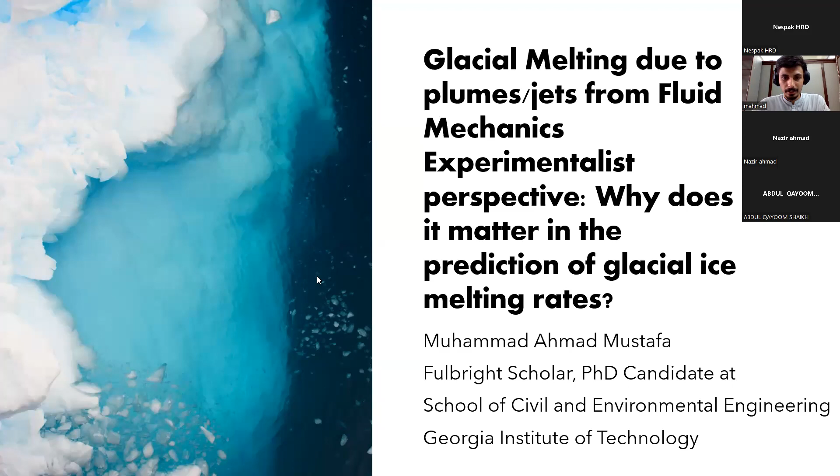Then I went on to a cultural exchange program at Portland State University, Oregon, USA. Keeping up the pace, I moved on to Georgia Institute of Technology as a Fulbright scholar for a master's. I did my master's in hydraulics and water resource engineering, and did a couple of research problems.

While doing the research problem, research really intrigued my interest, and thanks to the funding agencies as well who funded my PhD program to pursue my passion for research.

So as I mentioned earlier, I will be starting with the random jet stirred homogeneous isotropic turbulent tank. Before I start, let me mention, I would request Sabika if she can unmute everyone so that they can mute themselves.

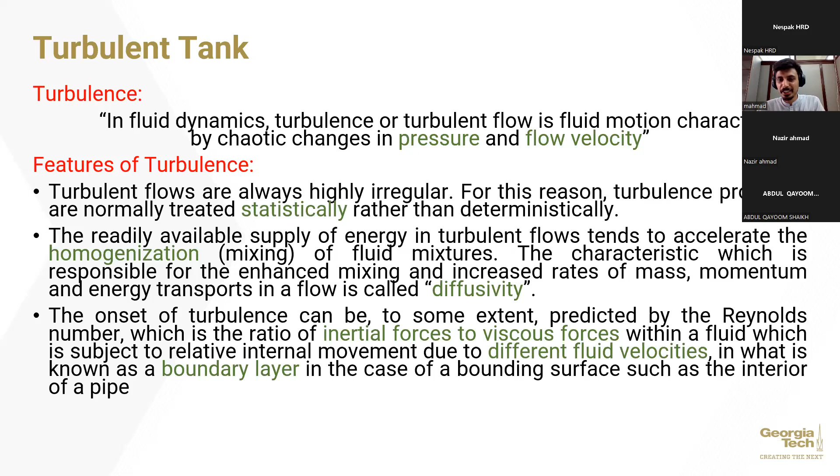I wouldn't go into that. That slide was just an introduction of what turbulence is and how it can be defined, but there are many definitions without argument. My work with turbulence is always with the phenomena of transport of environmental fluids.

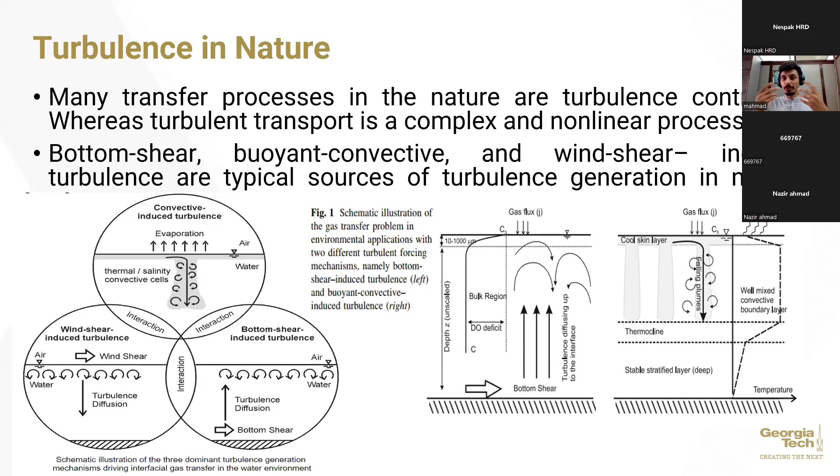This slide shows how different transport processes occur and how different turbulence-induced mechanisms happen, like bottom shear, buoyant convection, wind shear, through which oxygen is regulated in the water, and how oxygen or other pollutants like nitrogen or potassium are transported through soil or through the air in different means.

What are random jet stirred tanks? In the research field, I hope many of you already know about it. The mean velocities really interact with turbulence fluctuations. It's very difficult to actually decompose velocities into mean velocities and fluctuating properties.

So what we really do in research is try to isolate the random turbulence u prime, v prime, w prime fluctuations in isolation, and then study how they behave, and try to predict statistically, not exactly, how they are transported and what their role is in different mechanisms.

Over here you can see a random synthetic jet array. It's an array, like a grid, with different jets. These jets are nothing but simple submersible pumps, but connected to a program, MATLAB or Arduino. You program it in MATLAB to turn these jets on and off randomly, and then try to find the vortices or turbulence in a specific field.

The characteristic of that turbulence needs to be homogeneous and isotropic. Homogeneous means the intensity of turbulence, the U prime production, is the same in every direction. It also needs to be temporal, meaning the same throughout time. This means you cannot draw a conclusion from any study within just an instant; you need to study things over a long span of time and in every direction. That's why we need homogeneous isotropic turbulence, the same in every direction and continuous with respect to time.

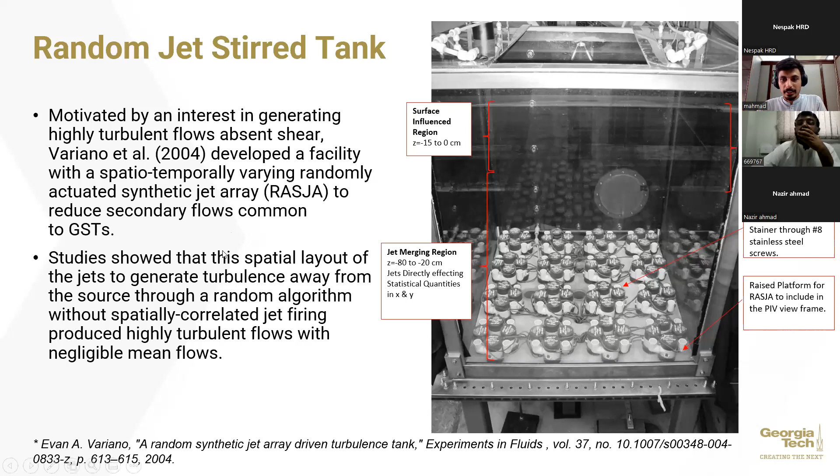This is another example of the orientation we created with homogeneous isotropic turbulence. This was introduced by Evan Variano, and they have different dimensions. It's actually quite an old technology now, with different tank dimensions. These homogeneous isotropic tanks can be used in different studies, including erosion, pollutant mixing, plumes, jets, and many things. This is just an overview; if someone is interested, I can share the slides.

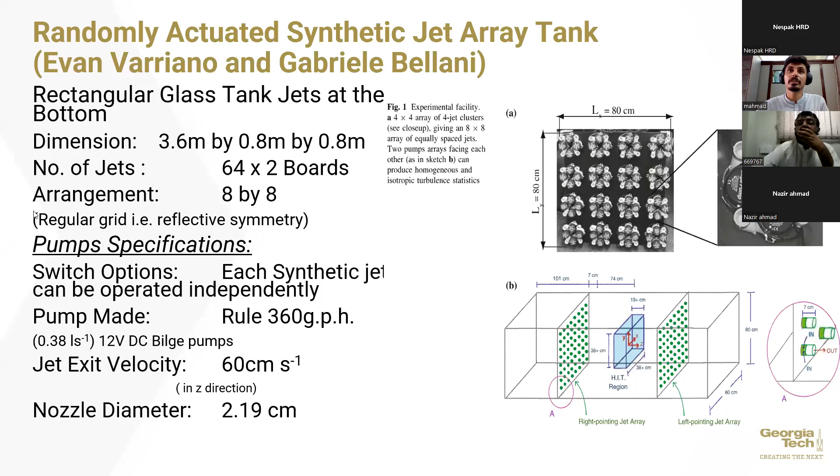Turbulence Reynolds number is a Taylor Reynolds number. If you're interested in fluid mechanics, that's another topic. What I'm trying to say is that turbulence has different scales with respect to length. To be precise, you see different sizes of vortices in natural flows. Even in rivers, there are big vortices and small vortices, and those vortices have lengths. Those lengths are the Taylor lengths, and from those lengths you can actually get the Taylor Reynolds number.

In the lab, we have always been trying to achieve a higher Reynolds number by increasing velocity. There's been a conundrum of how to achieve the Reynolds number without introducing any mean flow, because mean flow is actually the one injecting energy into the system. The maximum Taylor Reynolds number achieved so far has been 372, 378, which is still low compared to natural processes in the environment.

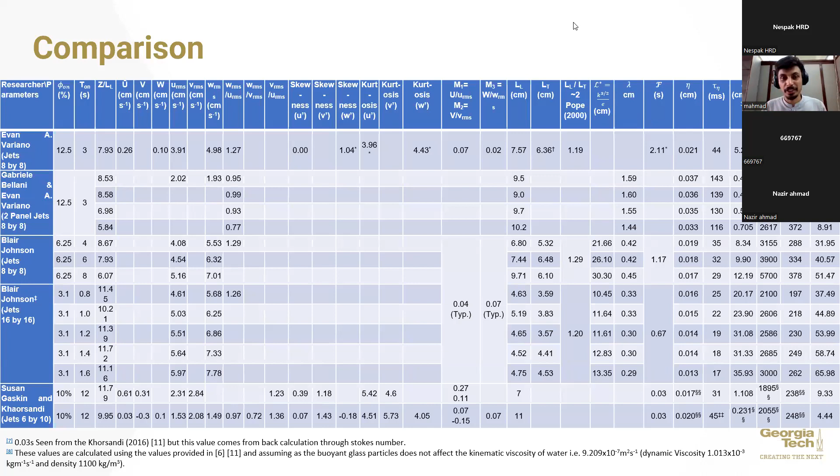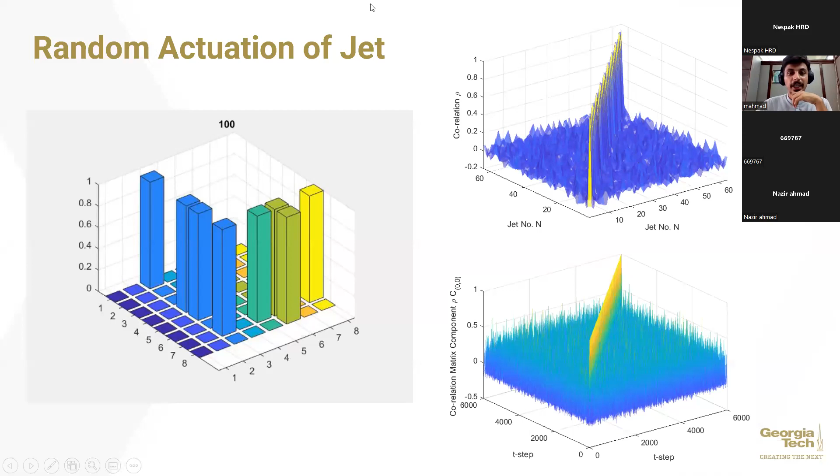Moving on, how do we increase the optimization of synthetic jet arrays?

Fractals, these are very interesting. Actually, this was the most interesting topic I came across. With fractals, there hasn't been any formal mathematical definition. Mandelbrot, who actually invented the fractals, and you'll be surprised how they were invented. Disney has their own graphics and mathematicians, and they've always been working to improve the resolution and outlook of the cartoons, trying to make it as real as possible.

One of the biggest questions for them was that there is a certain limitation to the shape. If there's a triangle, it's a triangle, and when we zoom in, it's a triangle. Let's say if you're making a mountain and represent it as a triangle, but as you zoom into the character, which is zooming into the mountain as well, you don't see the mountain anymore. You just see a flat line, which isn't actually like reality.

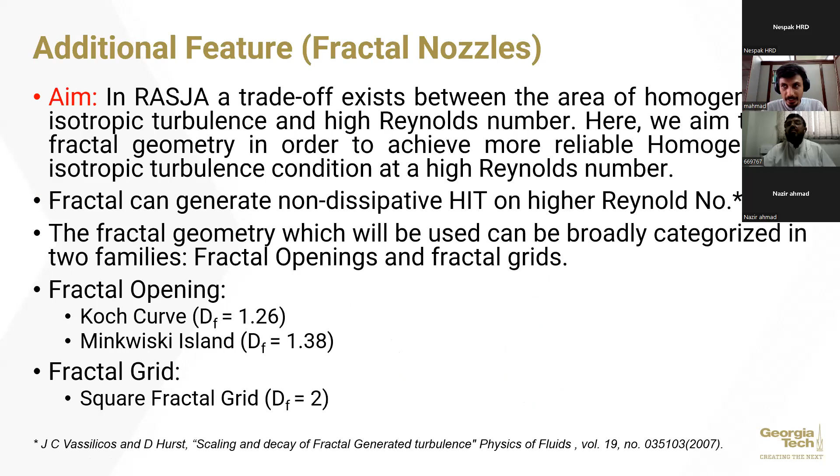You've seen a regular grid, which is just a mesh. Now I'll show you how the fractal grid looks. Before that, here are the two Minkowski and Koch diagrams in front of you.

We decided to go on to the fourth iteration. These are the cross-sectional areas and different major and minor details with respect to the figures, which I know you won't be interested in, but I'll just mention how we compared apple to apple, keeping the cross-sectional area the same as much as possible.

Moving on to the fractal grid squares—this is a grid scale, which I designed as per the fourth iteration. The cross section you're seeing is the cross section of the nozzle through which the water flows. The big rectangle with thick lining is the first iteration.

If you look at my mouse, I assume you can see that. This is the second iteration, and then this is the third, and this is the fourth.

The thickness is each sphere's thickness, measured in millimeters. You must be asking, it's quite thin—how would you be able to manufacture it? Interestingly, I'll show you how we manufactured it.

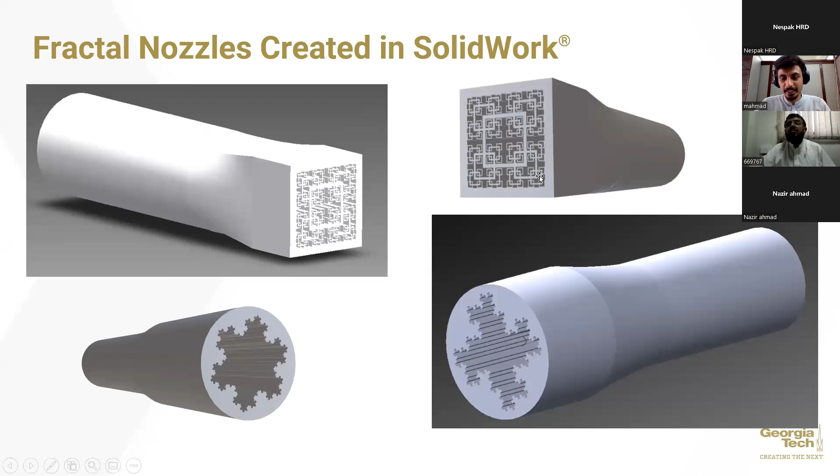This is actually the 3D diagram of the fractal grid which I built, and you can see it's an opening.

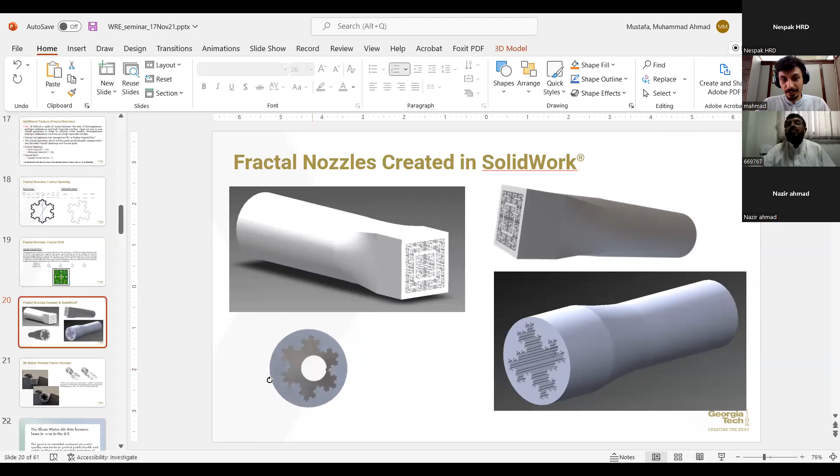One must ask how you can assume the flow will be developed. Well, if you can see, it's quite long along the flow line. That's another aspect we considered, giving a transition of 1/6 at the start and then 6D for the development length. That's how it forced out a jet. Similarly, this is the Koch triangle, which is an opening.

So we used a 3D printer to print these fractal nozzles. At Georgia Tech, I was fortunate enough to work in the Invention Studio, where you can 3D print, laser cut, or do anything you want. So what I did is I just 3D printed it.

The next thing we wanted to do was put it in front of the nozzle and study how the homogeneous isotropic turbulence can be enhanced. But due to COVID, we could not perform the actual experimentation.

However, another paper later showed the simulation. They haven't gone up to the fourth iteration, only the third, but they showed that yes, these fractal grids can actually enhance the homogeneous isotropic turbulence. Still, there's a lot of room for research, and we are surely looking forward to doing this project again.

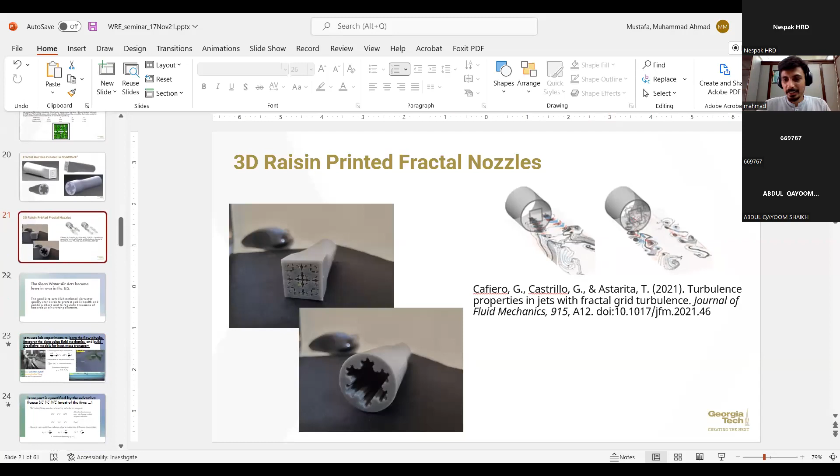Now, shifting gears, I'll be moving on to my PhD topic, which is the prime most important thing for me right now.

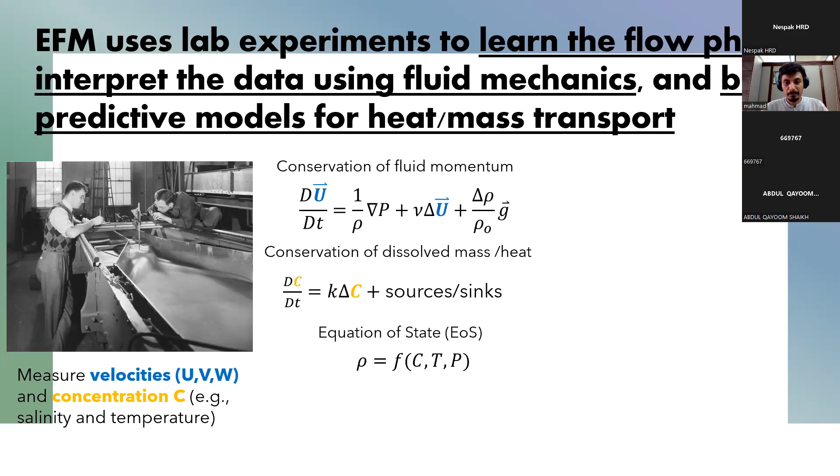Before I move on, I want to reiterate that as fluid mechanics researchers, what we build are predictive models for heat and mass transport. If you look at the Navier-Stokes equation, the conservation of fluid momentum, it has nothing but the velocities and the concentration. If you can find the vector and scalar field of a fluid, it becomes very easy to understand what the fluid flow is actually doing and how each and every mass transfer, each and every pollutant, is being transferred.

There are a few simulations which, as a PhD student, or graduate research assistant, I did with Dr. Chris Lai, my advisor. This video shows how we incorporated different shapes of jets and plumes in order to treat the seawater at the shore of Hong Kong.

This project was funded by the Chinese government. Hong Kong is densely populated, surrounded by sea with no land contact, and whatever sewage is treated gets discharged into the seawater. However, that seawater is recycled back to the shores, which is detrimental to the beach and public health. For this, we introduced different geometry of jet nozzles at far field to mitigate the detrimental effect of the discharge.

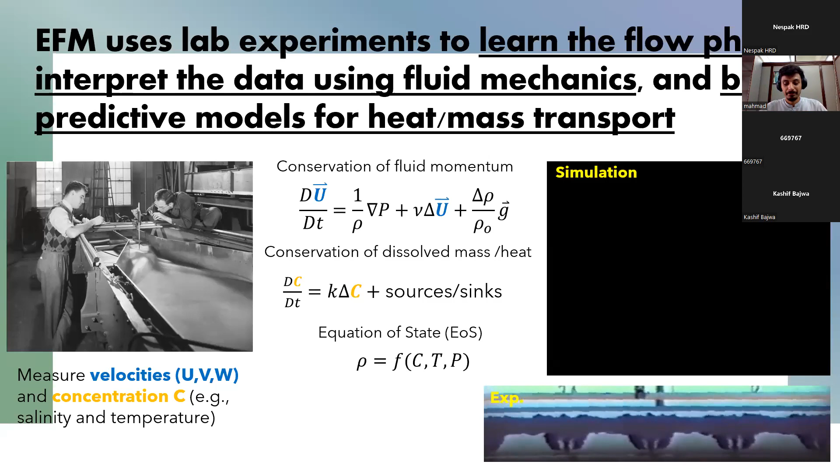Well, that was the simulation. However, the simulation needs to be validated through experiments. This is one of the experiments we did at Georgia Tech, in which we used what we call fractal plumes, through which different heights and different geometries of jet nozzles are introduced to enhance mixing efficiency.

I've already described that turbulence itself is nothing but fluctuations, and the fluctuations that can be visualized are nothing but vortices. These vortices move heavy metals, organic solvents, or other pollutants, which is the C prime, a scalar quantity. Similarly, heat is also a scalar quantity.

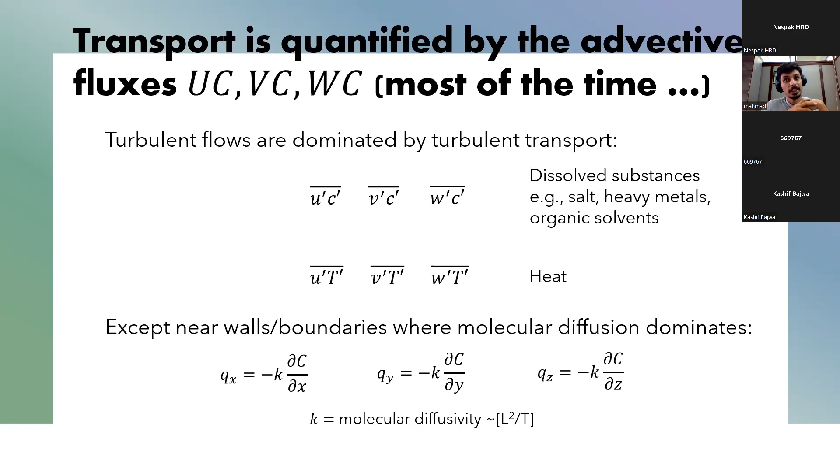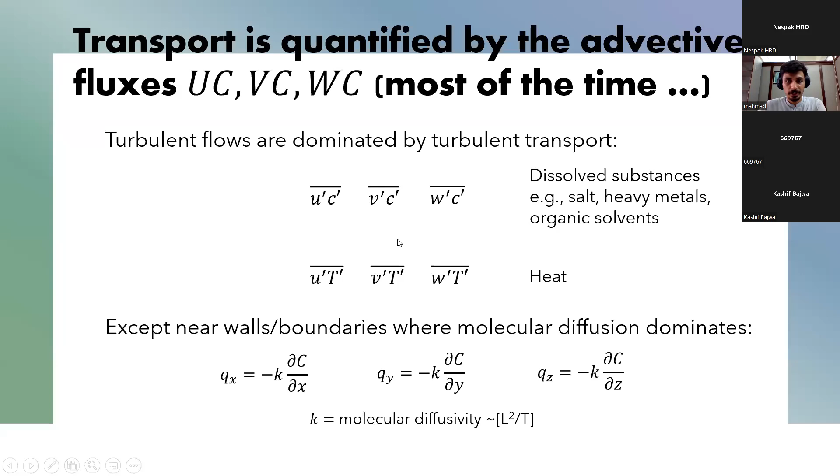However, this phenomena is beyond the micro scale. If we go to the molecular scale, every phenomenon with respect to concentration or velocities tends to follow the diffusion equation, shown at the bottom, which are nothing but fluxes. So reiterating, if you know the velocities and the scalar quantities, you can research any fluid flow.

What are jets and plumes? A jet is anything coming out of a specific geometrical nozzle. If the momentum is conserved and dominant, then it's a jet. If the momentum is not dominant and buoyancy takes over, it's called a plume.

You see many plumes in daily life, such as fire plumes and exhaust plumes. Even COVID studies are done using jets and plumes, because whenever someone sneezes or coughs, it's nothing but a jet or plume.

Now the question is how jets and plumes are introduced in ice melting. We'll discuss this later, but before that, I emphasize that we need to find the jets, the velocities, and the concentration.

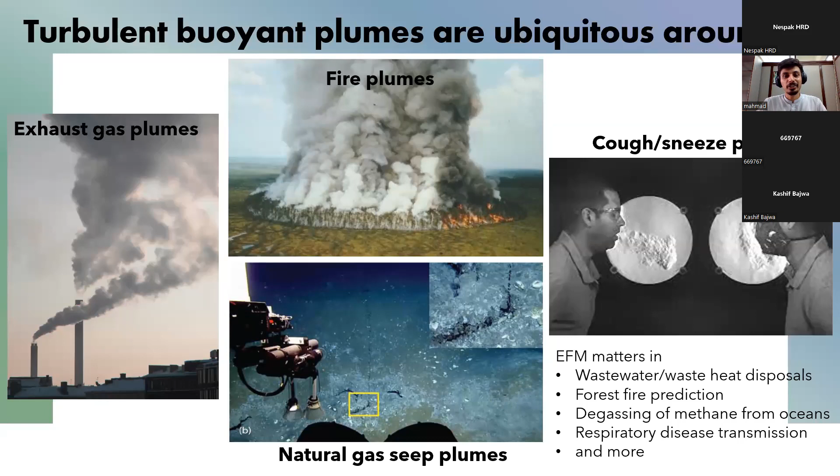If I redo it as an animation, you see something moving. So it's actually a vortex. Once you have these two pictures with delta t between them, you have the dots.

These dots are what we call seeding particles, but you can also call it noise in the picture. These two pictures are correlated and overlapped, but they don't really overlap exactly. Then I move picture 2 in every direction to finally find one good spot where they correlate, which is cross correlation. Now we know in which direction the picture has changed.

I know my magnifications, or you may say the scaling, and now I know the direction. So through this, I can easily get my vector velocities by just correlating these two pictures. On the x-axis you see the x pixels, on the y-axis you see the y pixels, and you can see in the animation that it was a vortex, and in the figure I can see the velocity vectors at each resolution.

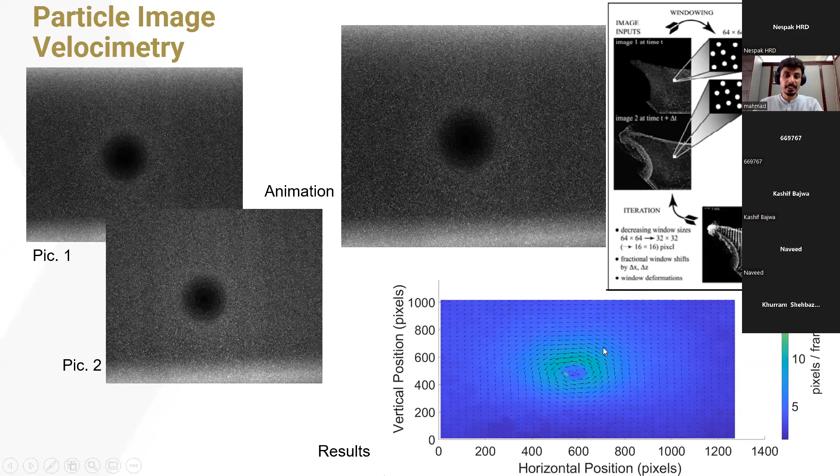This is quite a novel thing which we have been doing recently, the laser induced fluorescence. What we do is put two dyes, and each dye has an emission at different wavelengths. Let's say we fluoresce two dyes, rhodamine B dye and sulforhodamine dye. They absorb almost the same wavelength, 535, 550, not much of a difference, but they emit at different wavelengths.

What that means is I shine them at the same light intensity, but they emit back at different wavelengths. So if I put some filters, let me make it easy for you - it's not exactly correct, but just an analogy - if I shine these two dyes with a green light and put the filters, I can see that one will emit the red light and the other will emit the green light. I know it's not correct, but it's just an analogy of how we manipulate the filters, the long pass and short pass filters, to get two different dyes in two different colors.

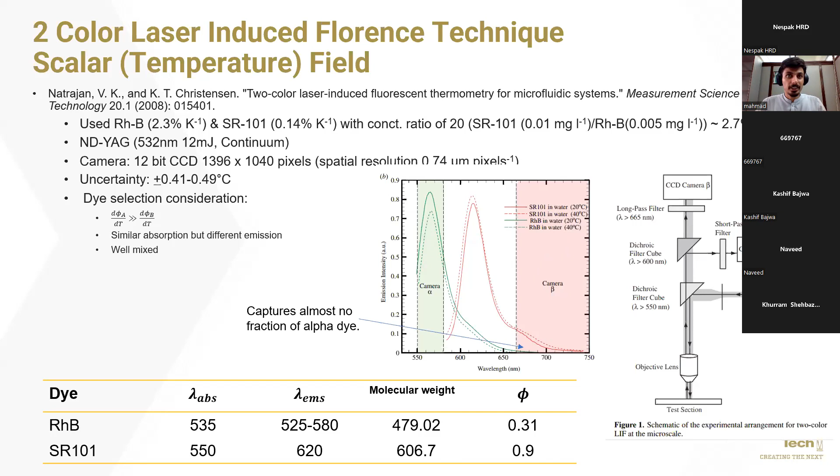This needs to be captured. One can argue why we need the second dye. The second dye is needed to normalize all the different correction factors in the first dye, which includes the laser attenuation, white field balancing, and the attenuation of the laser.

So with two dyes and two cameras - this is the first dye, the rhodamine B dye, this is the second dye. You may not see it clearly on a small screen, but on a big screen it will be pretty clear that in the first image you see a very bright dye. And even with this brightness, there is a difference in intensity at different pixels. You do all these corrections, and as soon as you do all these corrections, you get this image, very beautiful.

So what this image is describing is actually a jet placed at the top, shooting downstream. The jet is at temperature 0 degrees, and the ambient water is at normal room temperature, which is 24, 22. You can see the jet is being thrown downward, and it's expanding at a degree of 6 degrees, which is the characteristic of a jet. You see the different vortex phenomena, the velocity variations, and the concentration variation.

Now, through this color scheming, you can see that here the temperature is quite near 4 degrees Celsius, whereas the ambient temperature is 22. Now you know the scalar field as well.

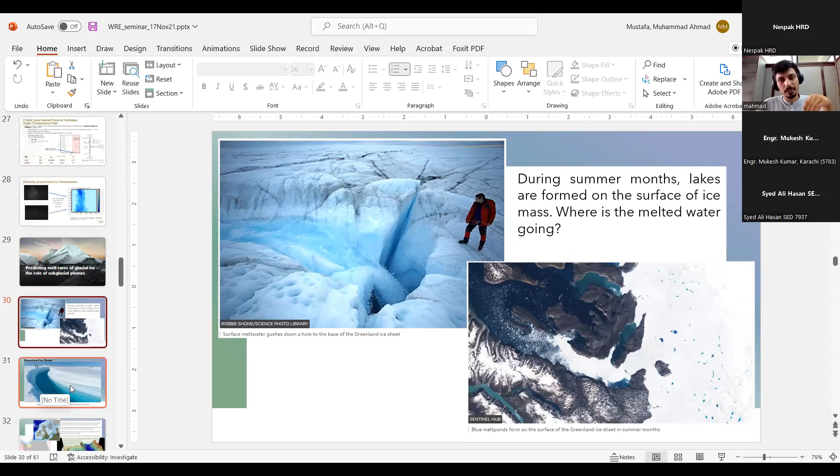So they go on to the bottom, but if they are going at the bottom because of gravity, where are they heading? What we can find with the new satellite imageries is that these lines you see are the subglacial channels. They were the old channels which were being eroded or made by the subglacial water.

So whatsoever the lake is, once the lake is being formed at the Arctic surface, that lake is connected through the subglacial channels to the bottom, or the surface of the earth underneath the glacier, and they actually erode and make their way towards the sea.

How are these being confirmed? These are being actually confirmed by these images. So you see that my mouse is pointing at an image of the Arctic, and you see the pink color which is showing the temperature of the far field sea temperature.

We see there's a lot of melting, as there's a red color over here, showing that due to the ocean circulation and the hot water intrusion, there's quite a lot of melting occurring. But why is the melting observed here when it's actually surrounded with cold water, which can be seen as blue? This melting is actually being exacerbated or enhanced due to the underneath glacial plumes.

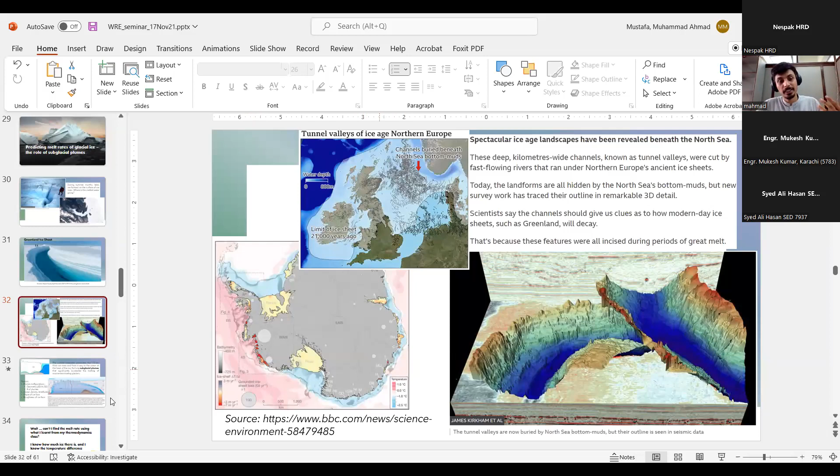In this image, you can see that there is a surface. The surface lake is connected to the bottom channel. The bottom channel runs along the termini of the glacier, and then it rises up.

Why does it rise up? Because this is fresh water, and this is seawater. Seawater has salinity, which is always denser than the fresh water. The fresh water is being melted at a temperature of 0 degrees Celsius, whereas the seawater, we have learned through science, is at a temperature of 4 degrees Celsius. At 4 degrees Celsius, and with a lot of salinity, seawater will always be denser than the fresh water.

So it rises up. As it rises up, the plume has its own characteristic that it entrains the ambient fluid, which can be seen over here, which further introduces the hot water. This hot water is being introduced, and the boundary condition at the termini of the ice keeps on recirculating and melting.

This is one of the particular phenomena which I am working on, and we have observed through different studies that there are many factors which actually contribute to the different melting rates. Why is this melting rate important?

Because one of the most recognized melting models or melting simulations right now is MITgcm, which is from MIT University, and it's an open source software. Even in that, we haven't seen...

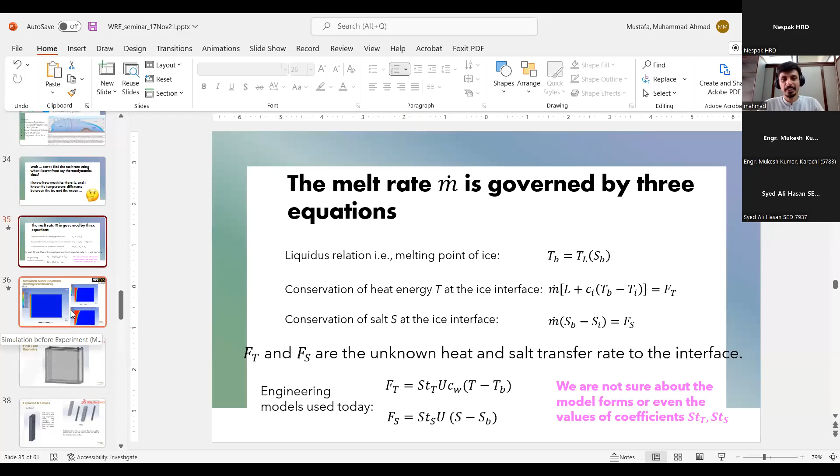It is only a singular simulation of ice melting without any background flow, without any jet influence, in ANSYS, and wanted to see how the mass fraction ratio changes with respect to the geometry.

This is the length of 33 centimeters, and we assumed, referring back to the literature, we came up with a solution that let's do it 3 times, and the jet, a wall-bound jet, will further enhance the mixing, and it will give me a window of 10 minutes to observe the experimentation.

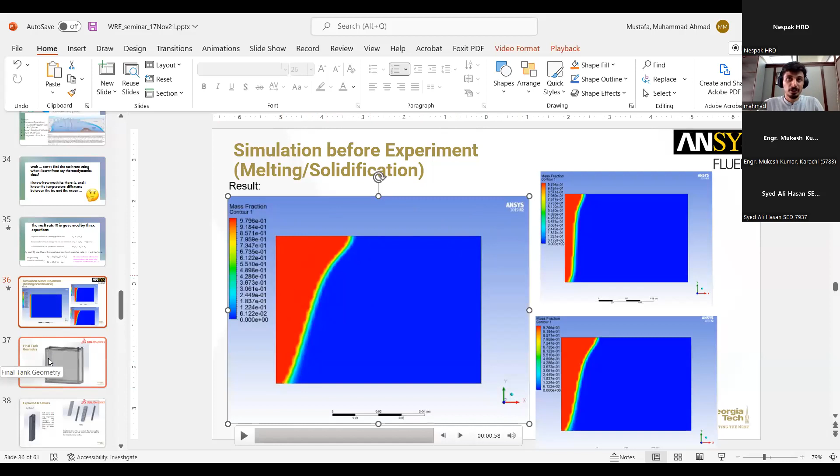After coming up with the solidification melting analysis at ANSYS, we did a SolidWorks drawing. It's another software. I highly recommend it, especially for engineers, to learn it, because it also helps in analyzing BOQ drawings, construction drawings, all in all.

So this is actually a tank. It's representing, this is a slab. These dowels which you see will hold the ice attached to them. Once it's inserted, a jet plume is attached at the bottom, which will be shooting at the face of the ice, and it will be melting the ice.

Question: why is this so long? This is so long so that the far field condition cannot be changed, as you see in the ocean, and the only changes happening are at the near field.

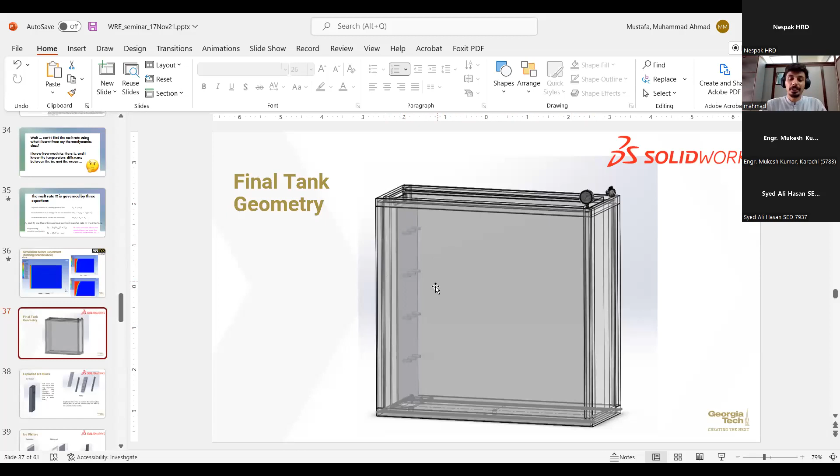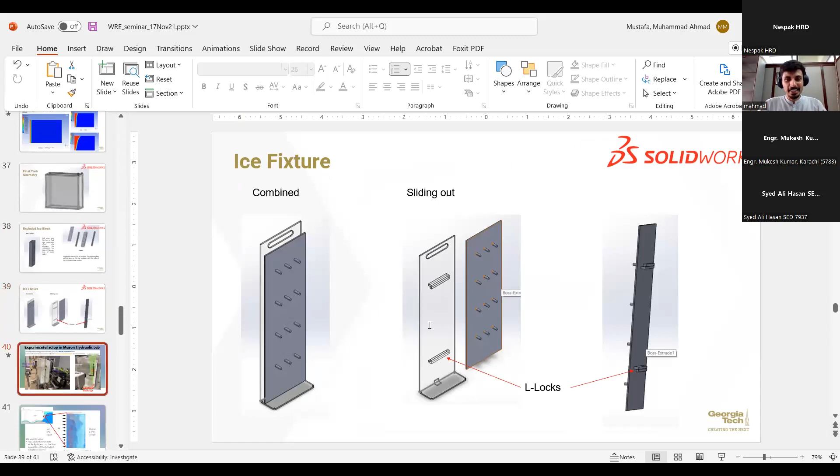This is how we make the ice, and I'm going to cover it quickly now because I know you people are covering quite a lot of work. So this is the experimental setup which I built.

One of your questions should be why we use laser, so high intensity laser. And the answer is that because the flow fields are so fast, you need to capture at a very small instant. And as you decrease the exposure time, the camera sensors, CCD sensors, need a lot of bright light to capture the signals.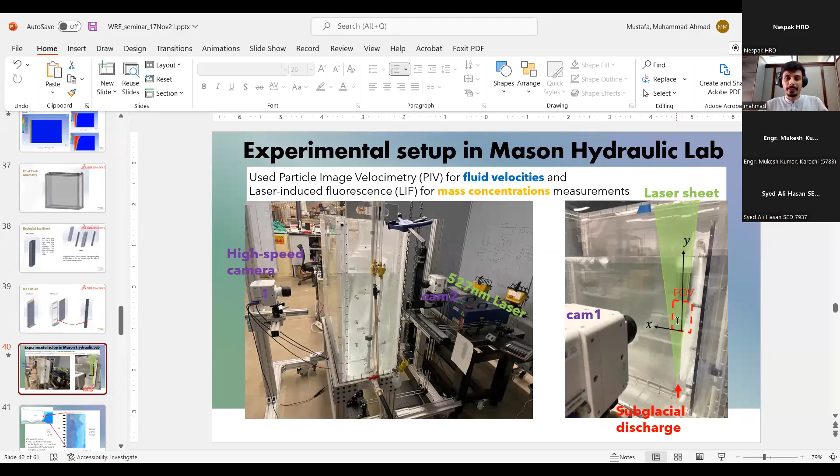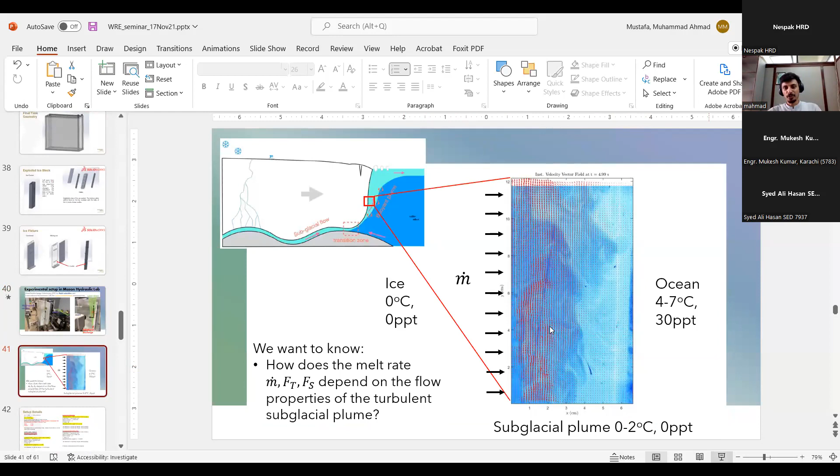Moving on to that, this is the final thing which we did at the Georgia Tech lab. So this is an image which you can see showing the temperature variation as well as the velocity fields.

And then the other thing which you see is there are slanting arrows. These slanting arrows show how the far field hot temperature water is being entrained into the jet and being transported at the face of the ice to enhance the melting.

These are a few of the details from the experimentation: 2.71, 25 hertz camera, magnification of 0.35. Magnification of 0.35 means at the denominator it will be the real length, and at the numerator it will be the length of the sensors.

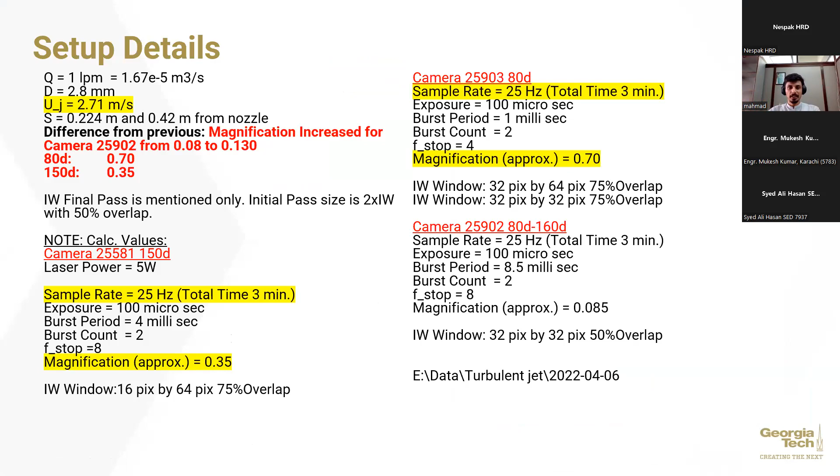These are the velocity fields, velocity vectors, just to show you how the velocity fields look like. These are the baseline results for whatever we have been doing. These are the velocity fluctuations, URMS. This is the mean velocity, U, mean velocity Y. U and V are in the same direction as being represented with X and Y.

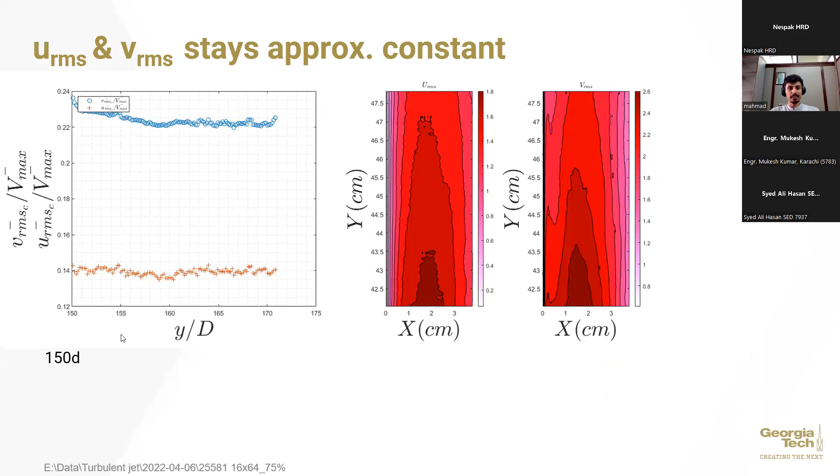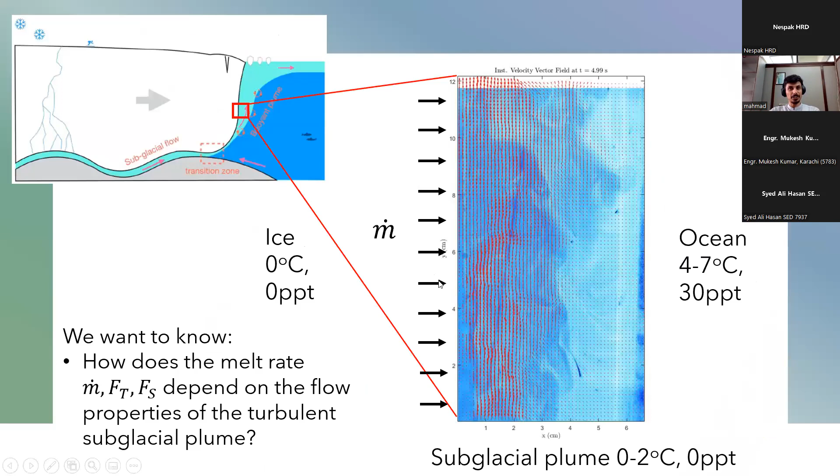Moving on to different lengths, it was being measured at 80D, that means 80 dia of the jet, and then 150 is 150 times dia of the jet away from the face of the jet. This will be the velocity profile, normalized by Vmax and the width of the jet, which shows the self-similarity, and that is one of the characteristics of the jet.

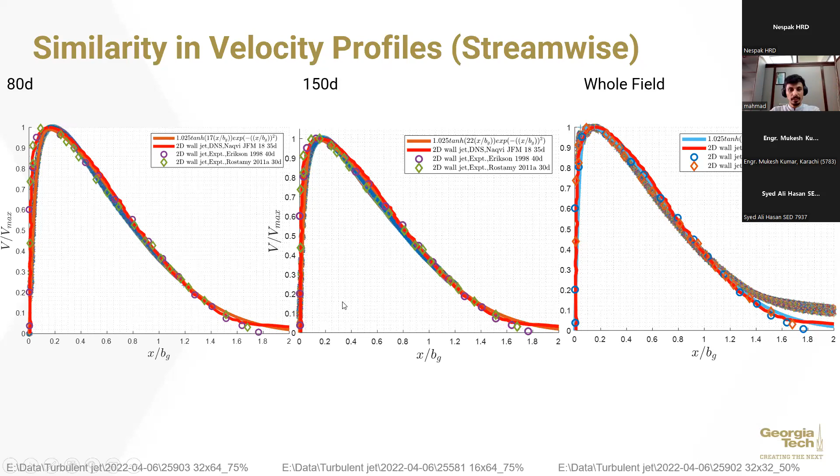Moving on, these are just the results, and it obviously shows that these jets, even the 3D jet, are more comparable to having an independent entity, but sometimes they show themselves as 2D wall jet instead of 3D wall jet. 2D wall jet or line jet, they are the same thing.

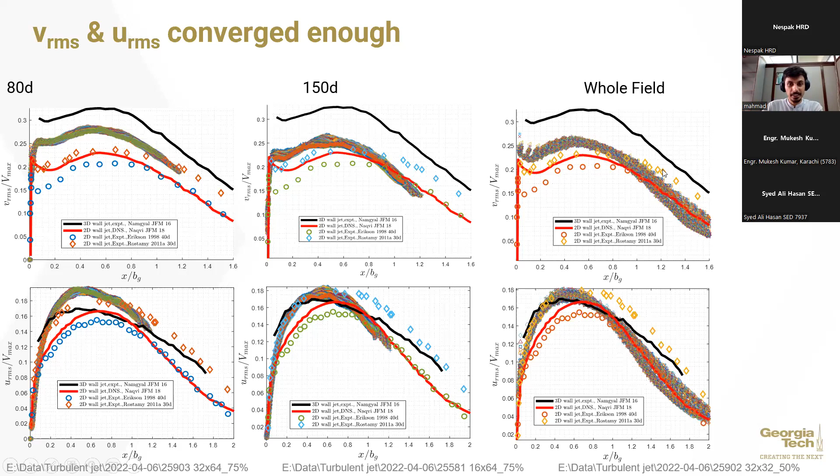Over here we see the 3D jet, but these results are actually with respect to the fixed wall. Interestingly, first we started with a fixed wall and looked at all these results. We saw that all of them are behaving like 3D wall jet, and they're good, but they are comparable with 2D wall jet. It's okay, they are a bit divergent, but still they are comparable.

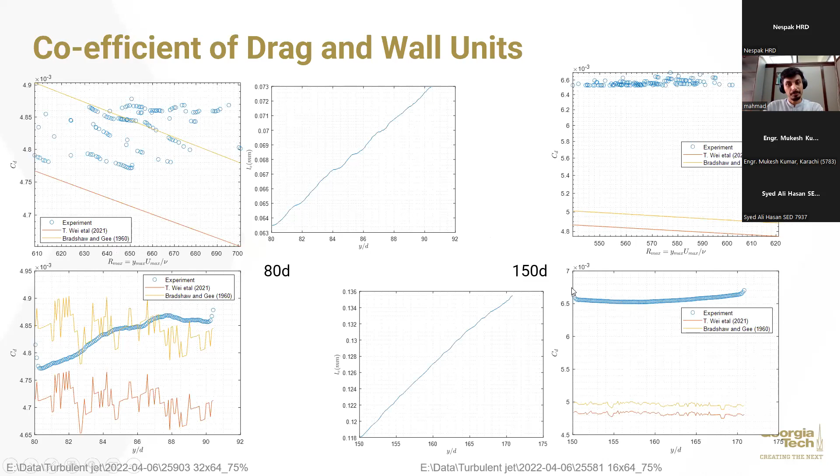Then we measured the CD, coefficient of discharge, coefficient of drag, and shear length. Moving on to the velocity profiles within the wall units, that means what we are looking for is how accurately we captured the molecular diffusivity.

We have been able to capture pretty good far field, or you may say the macro length, beyond Taylor macro length velocity, but at the molecular level, we still need a little more effort, even though it's quite a good measure here, but still.

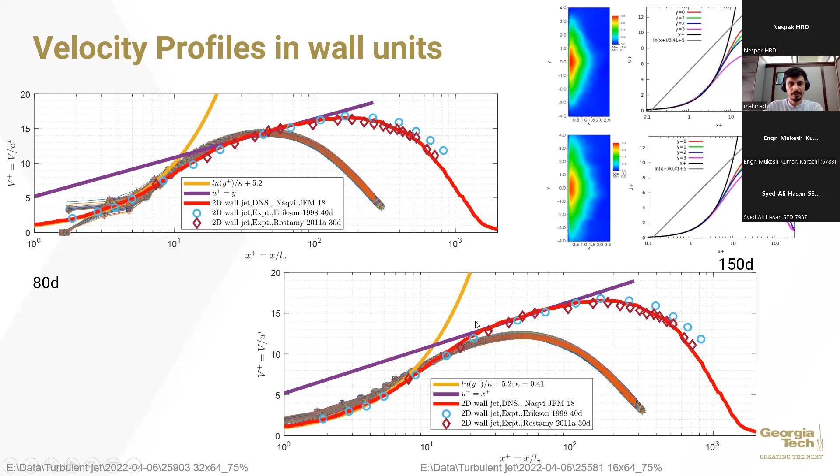One data set played at 1/20th of the sampling speed means it's just this 1 second length of time, but played for you reduced by 20. You see the vortex structures being traveled up, and over here, even though you see there's almost no movement of velocities, in reality the velocity fluctuations, the advection, they are being traveled, shifting the heat and enhancing the melting rate. What we observed is perfectly again the same thing.

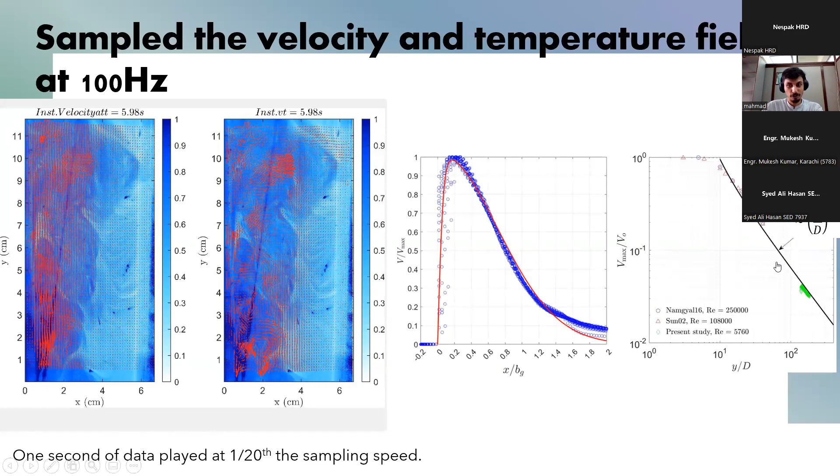Now this result is actually the ice melting. So now we see that they are a bit different. Overall, the trend looks pretty good with respect to the 3D jet, as we observed with the phase.

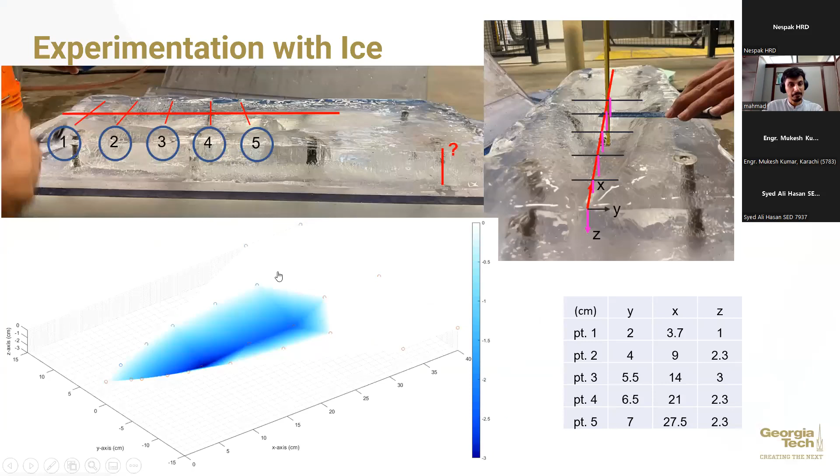So after looking at the drag coefficient and then comparing the data with 2D and 3D, it was interesting that the jet, actually the wall-bounded jet, changed behavior from 3D wall jet to 2D wall jet as soon as it was introduced in the ice because of the moving boundary.

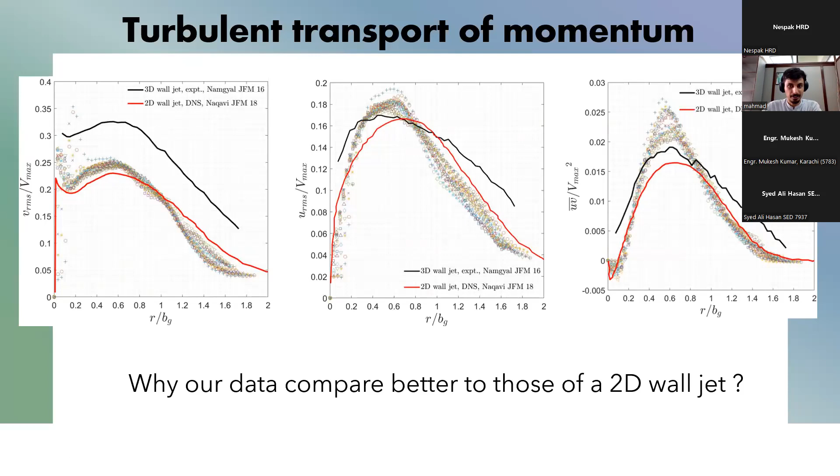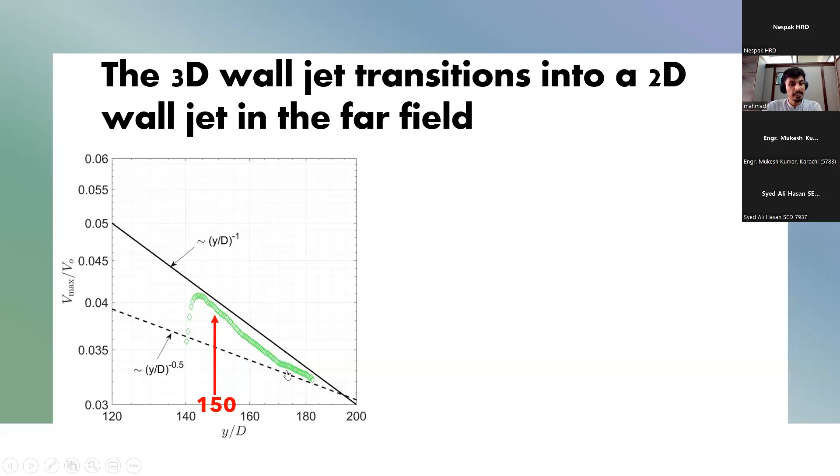The same thing was observed with the velocity. This curve is for 3D jet, whereas this curve is for 2D wall. That means that at certain length, due to the wall melting, as we saw in the previous slide, the conical thing is getting flat at the far field, changing its behavior from 3D jet to 2D jet.

This was a simulation, and we looked at how it was actually implemented, and it totally follows the experimentation. So we still believe there is probably a transition from 3D to 2D jet in glacial ice melting, which should be incorporated into the MITgcm systems and different models, which will help the scientific study and proper prediction of melting rates later on.

That's how I conclude my presentation, which was totally on glacial ice melting. I showed you different tools of experimentation and how the simulation works. Yes, simulation works, but it has its own limitations. It has a fixed boundary and many other things.

That's where you just cannot really use strictly ANSYS or different commercial software for moving boundary problems. The other thing is how experimentalists are actually validating the simulations, coming up with basic fundamental challenges to the basic fundamental questions of the different models. If you have any other questions, I'm more than happy to answer. Thank you.